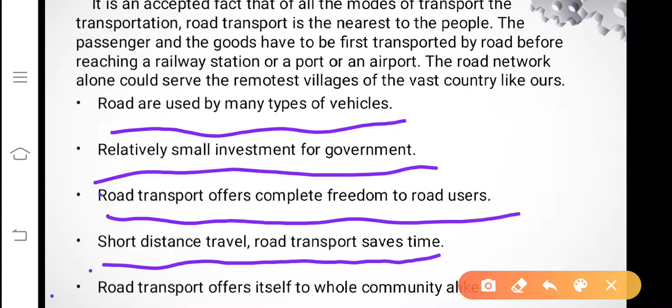Next characteristic point is short distance travel. Road transport saves time - definitely short road distances are much cheaper, save time, and are comfortable to the public. Another characteristic point is that road transport offers itself to the whole community alike.

Also, speed of the movement is directly related to the severity of accidents. When there is flexibility or freedom to the road user, there will definitely be more accidents. That's why we observe more accidents on roads compared to other modes of transportation. However, we should not forget that even a single derailment or a single air crash becomes more disastrous - it takes away many lives of people, and also damages huge costs of vehicles.

Therefore, road transportation, if provided with a good network and roads constructed with smooth surface, easy gradients, and easy curves on horizontal alignment, with good vehicles and safety, the road user can drive his vehicles without doubt.

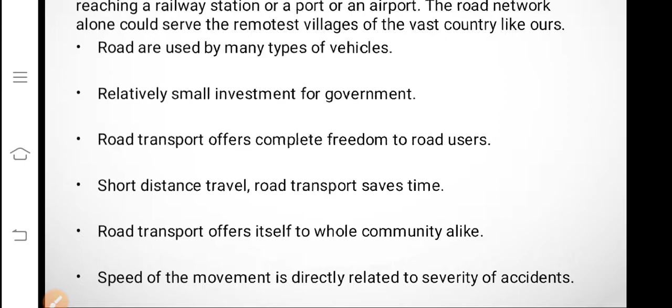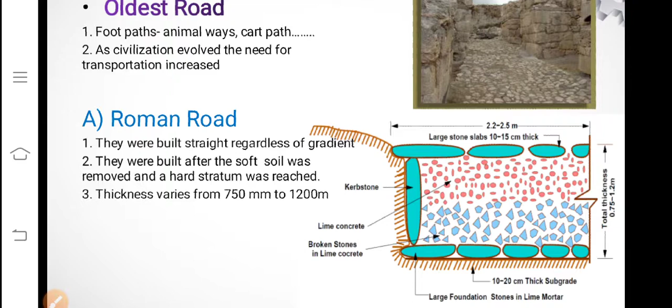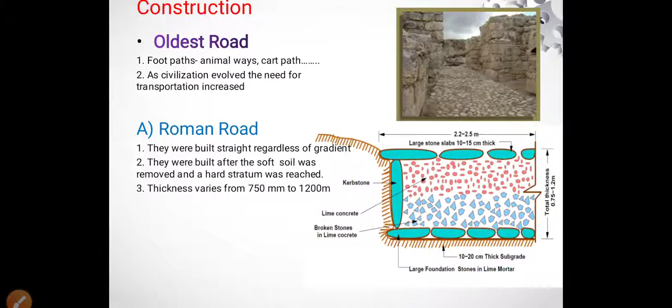Next, we will see the historical development of road construction. In olden days, people used to use the footpath as a road and moved on the footpath itself. Then they started carrying materials, and even people, on camels, horses, and donkeys. Even till today in rural areas, we can see such movement of people and material from one place to another using domestic animals.

After the invention of the wheel, as civilization evolved, the need for transportation increased. People felt that in order to move these steel-tired vehicles on road, the road surface provided should be hard enough - meaning a hard surface should be provided.

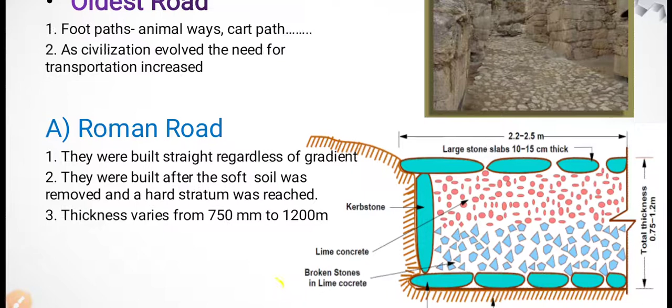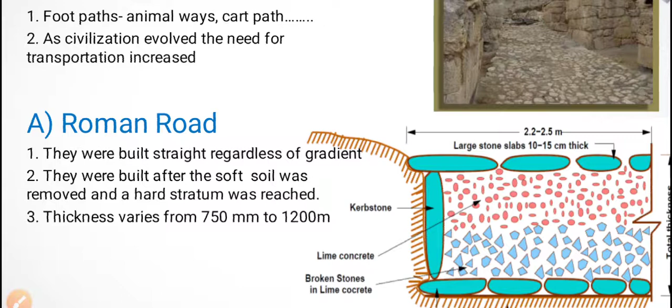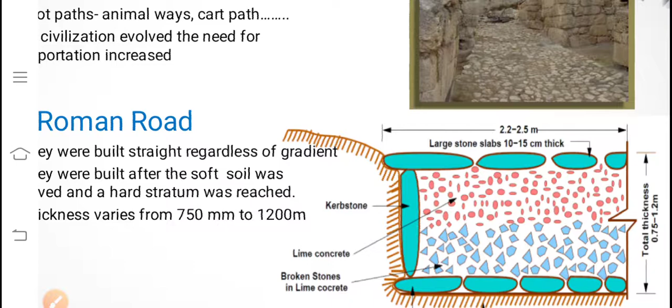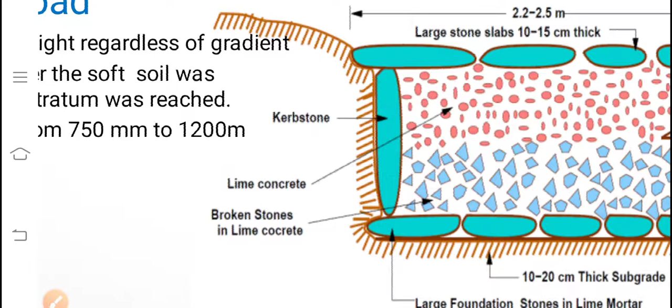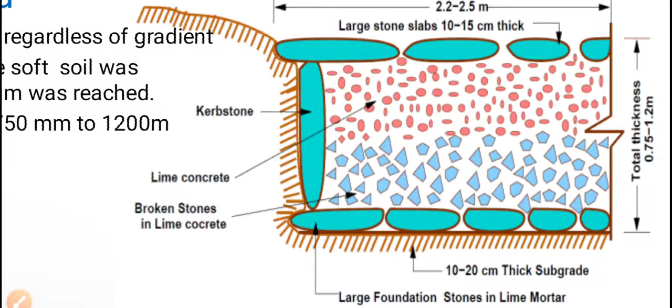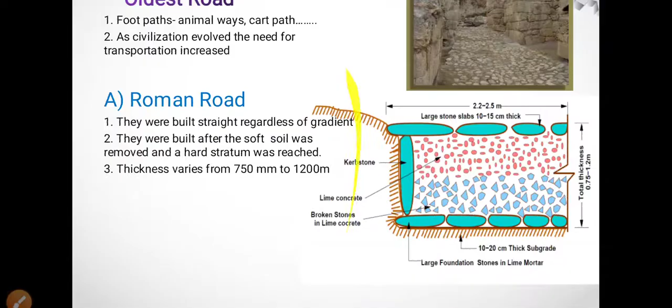Next, these are also different views of the Roman road.

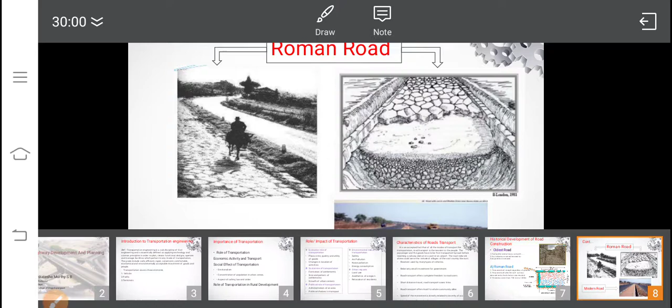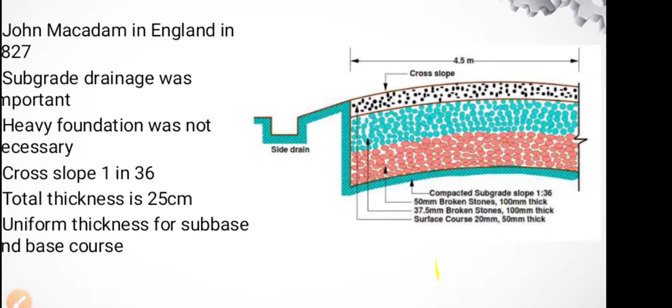Next one, Tresaguet road. This is also of such nature, with huge thickness. The cross slope they have provided is 1 in 36. Total thickness is 25 centimeters, with uniform thickness for sub-base and base course used.

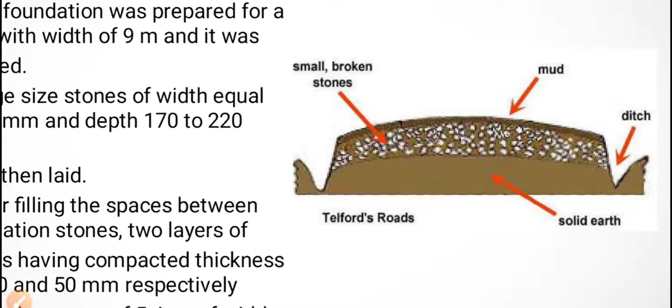Next one, Telford construction. This looks like a fruit cake, but it is not. The below portion is solid earth, the above portion is mud, and in between, small broken stones are compacted.

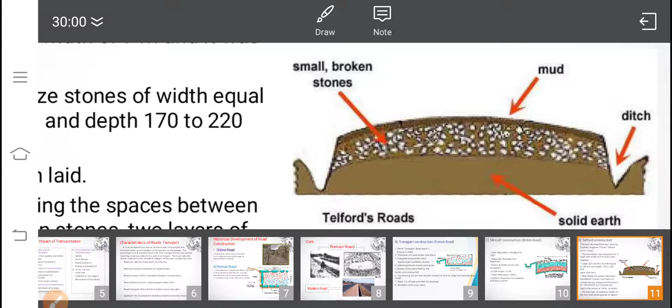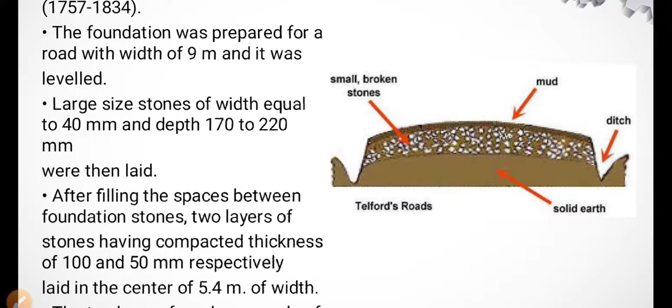The depth is around 170 to 220 mm of road construction. Large size stones of width equal to 40 mm are used. After filling the space between the foundation stones, 2 layers of stones having a compacted thickness of 100 and 50 mm respectively are laid in the center, over a width of 5.4 meters. The top layer of the road was made of a 40 mm thick binding layer of gravel.

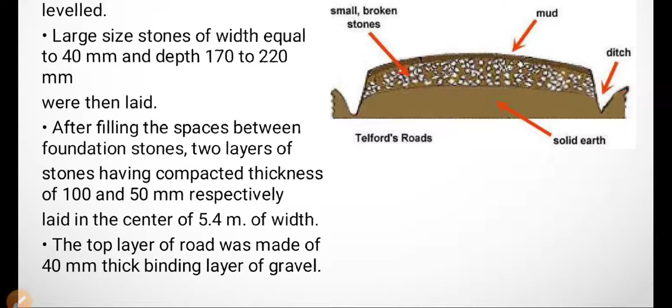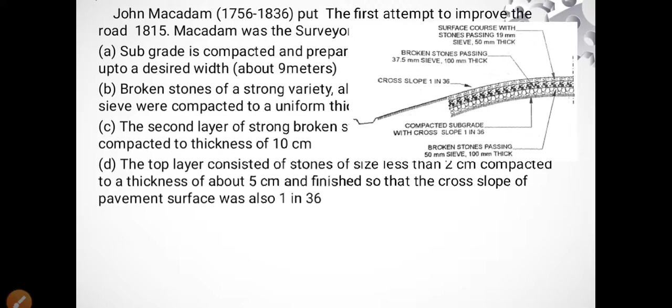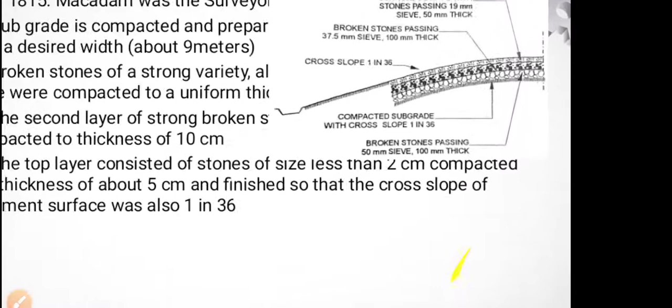Next is macadam construction, which gained importance in the year 1827. He was the Major General Surveyor of England, and he constructed the road with scientific thought. There are 2 scientific points he put forward: one with respect to drainage, another with respect to the slope to be provided from the subgrade level itself.

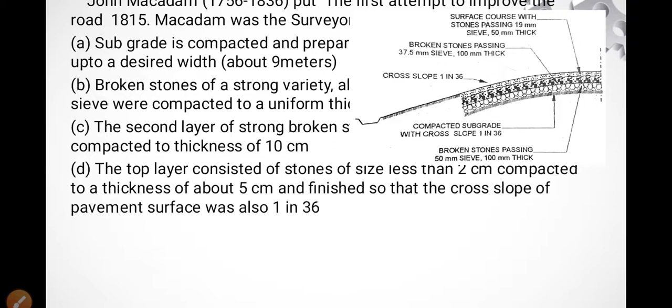In all layers, the slope was maintained up to the surface. The slope provided was 1 in 36. Gradation of aggregates was used so as to make proper drainage, so that the soil or any other material in different layers will not come in contact, so it will not lose any strength, and can take more load coming over it. That was the scientific thought.

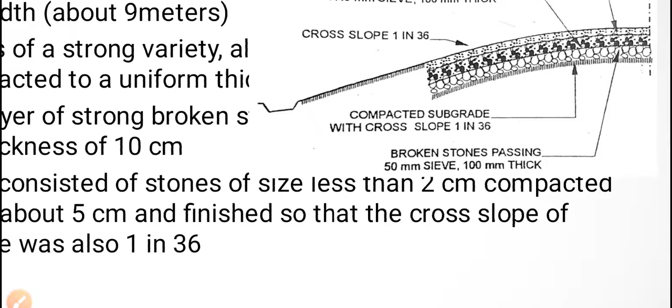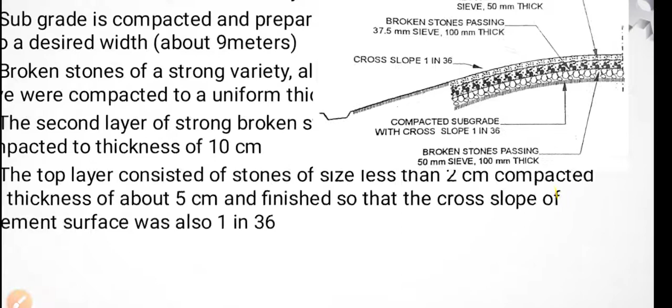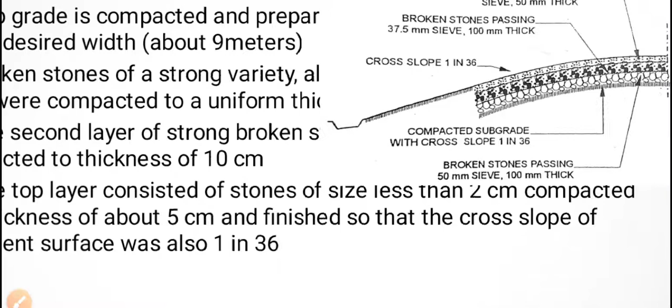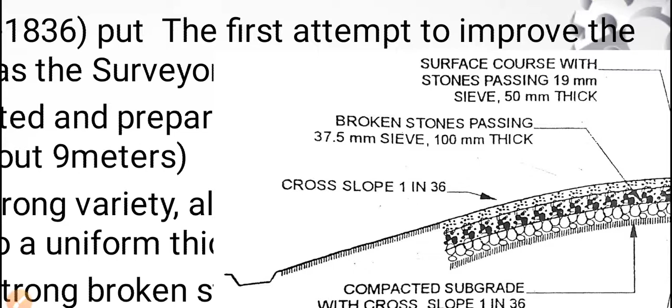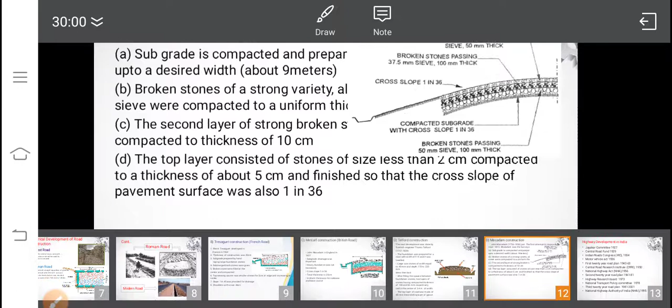Next, highway development in India. After the First World War, the roads which were existing could not cope up with the then present traffic, especially mixed traffic flow conditions. It could not sustain the motor vehicles which were plying on the roads.

Then the government gave thought to form a committee so they could look into these problems of road construction, thereby good roads could be provided to society. Accordingly, both chambers passed a resolution and formed a committee known as the Jayakar committee under the chairmanship of Mr. M.R. Jayakar, who was the first vice chancellor of SPPU.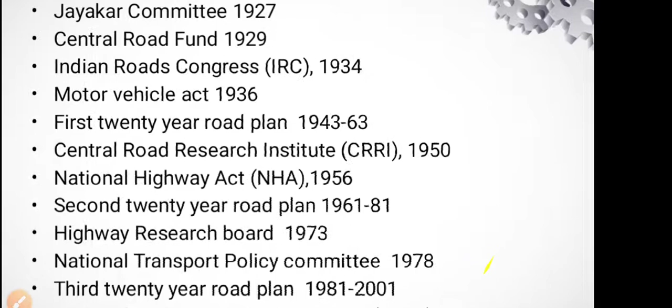Earlier it was Pune University. The committee was formed in the year 1927, and they submitted the report in 1928. We will come to that a little bit later. Then the Central Road Fund, as per the recommendation of the Jayakar committee, was formed in 1929. The Indian Road Congress was started in the year 1934.

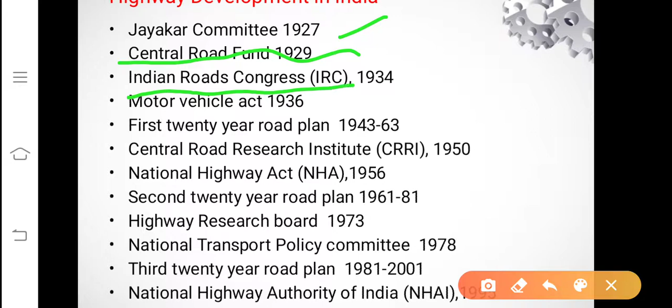Then the Motor Vehicle Act in 1936. The first 20-year road developmental plan ran from 1943 to 63. Then the Central Road Research Institute, CRRI, in 1950. National Highway Act in 1956. The second 20-year road developmental plan started in the year 1961 to 1981.

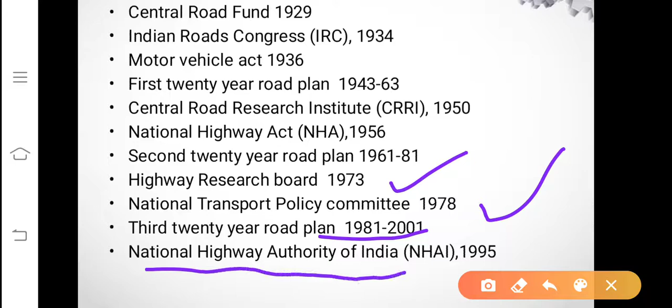Further, the Highway Research Board, one of the sub-bodies of IRC, started in 1973. The National Transport Policy Committee, to arrive at different policies, was formed in 1978. The third 20-year road developmental plan, a long-term developmental plan, covered the period 1981 to 2001. In the year 1995, the National Highway Authority of India started.

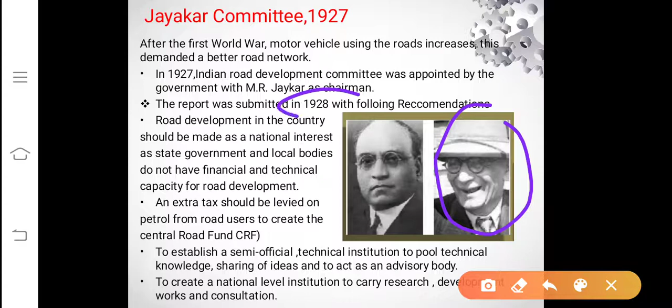This is Mr. Jayakar, who was the chairman of the Jayakar committee, formed in 1927. They reviewed all the defects, problems and difficulties faced by the people and road users, and submitted the report in the year 1928, as you can see here.